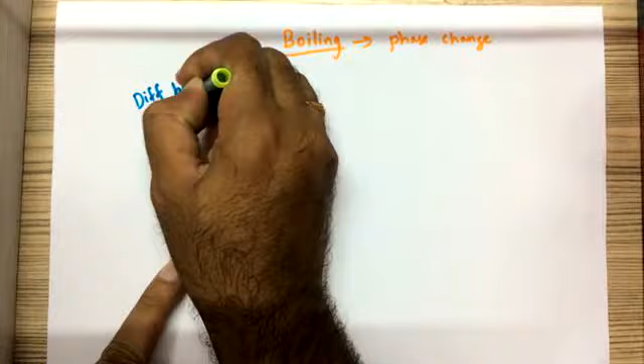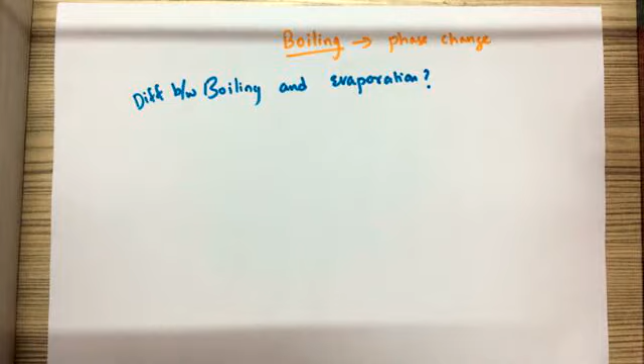Now, boiling is definitely, there's no doubt, a phase change. If I ask you the question, what is the difference between boiling and evaporation, you may answer, but you will definitely say that both boiling and evaporation are related to phase change. We know both are related to evaporation itself, phase change itself.

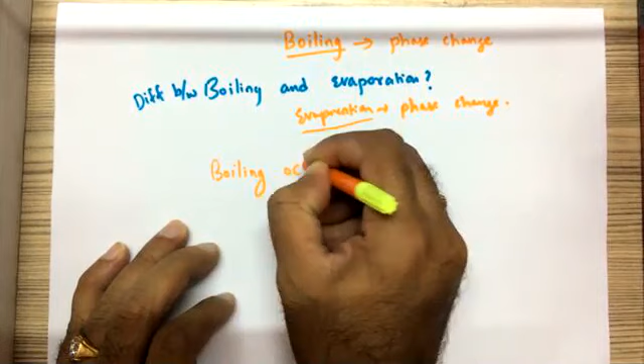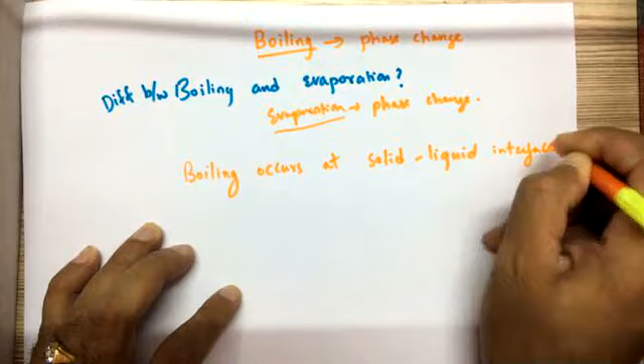Now the difference between boiling and evaporation is: boiling occurs at the solid liquid interface, whereas evaporation occurs at the liquid vapor interface. I hope you understand now what I'm talking about.

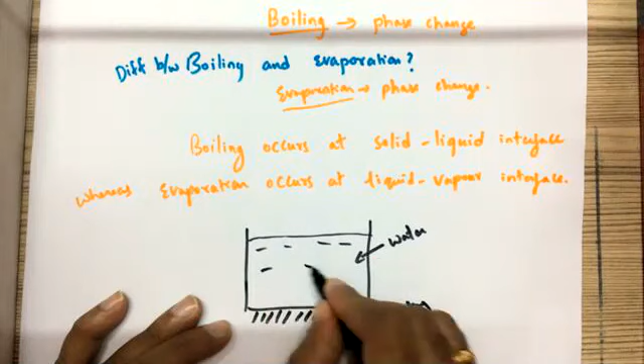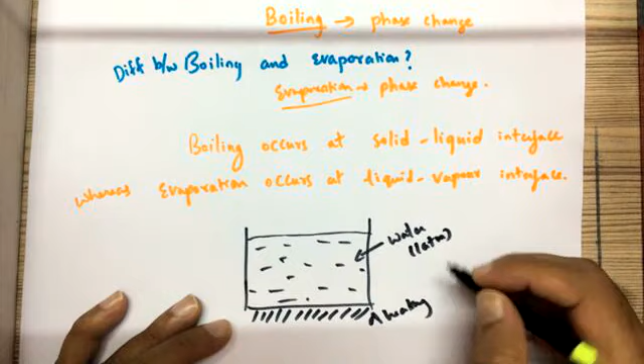Now let me take a kettle, and I'm just giving heat from this end, I'm just heating it. Inside I have some liquid, let's say water, at normal atmospheric pressure, which is 1 atmosphere. This is solid, this surface, and inside I have liquid. And here I have vapor.

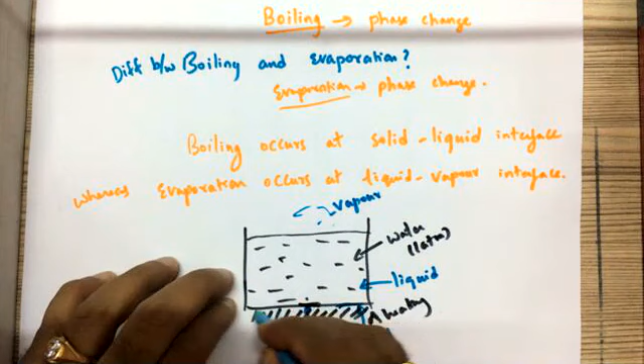So what is this interface? This interface I can call the solid liquid interface. This is solid and this is liquid. So this particular layer, I can call it the solid liquid interface.

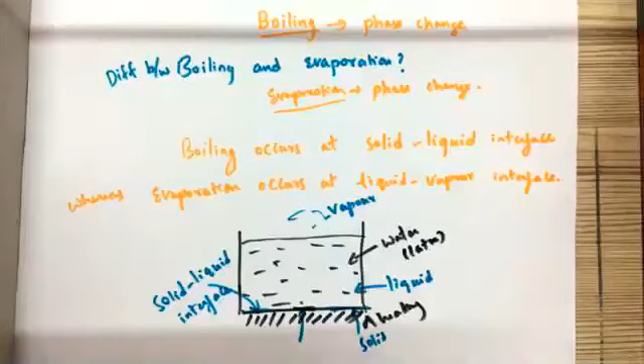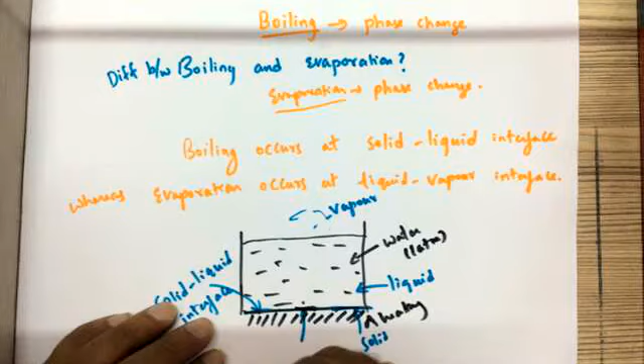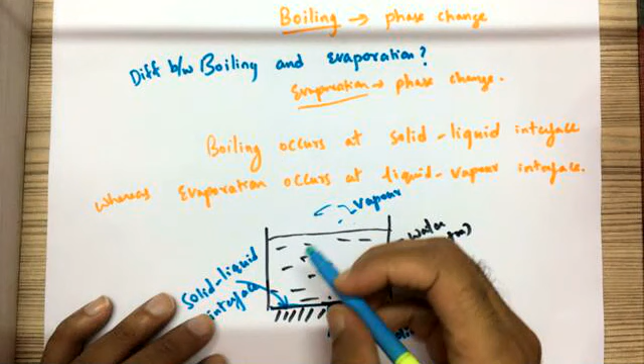So this is like, I have a pan, and on top of that I have some water. Then I can say that particular layer of water, which is on the surface, that layer or imaginary interface, we call the solid liquid interface.

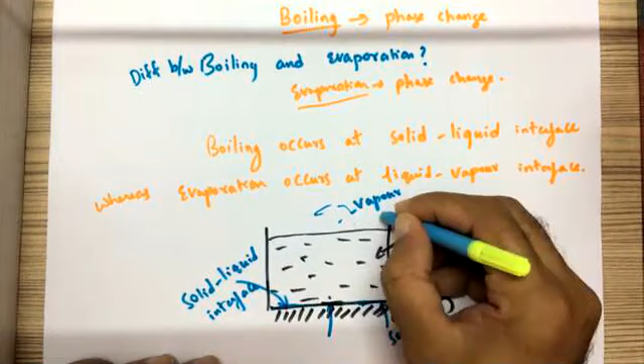And this, as you know very well, is vapor and this is liquid. So this would be the liquid vapor interface. Am I right? Now if you observe very carefully, boiling occurs here.

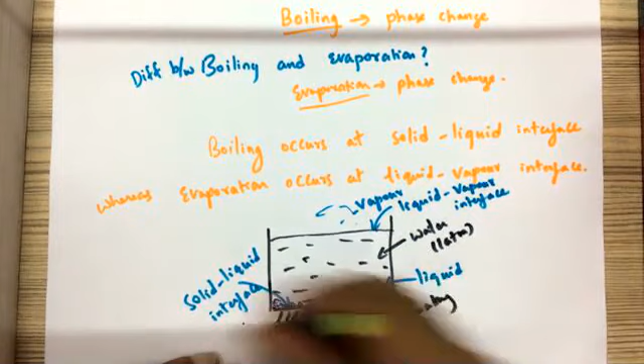You see small bubbles rise. Initially they occur at the surface of the pan. So what is that surface? That surface is nothing but the solid liquid interface. So boiling always occurs at the solid liquid interface.

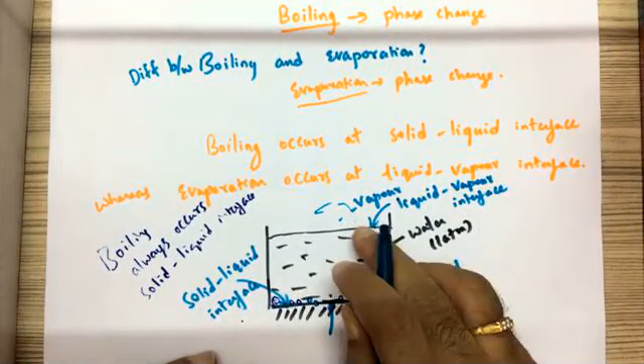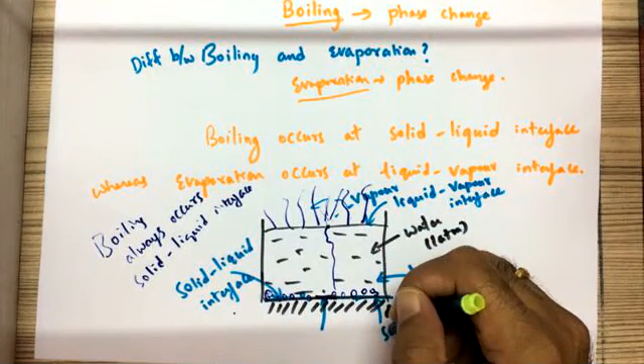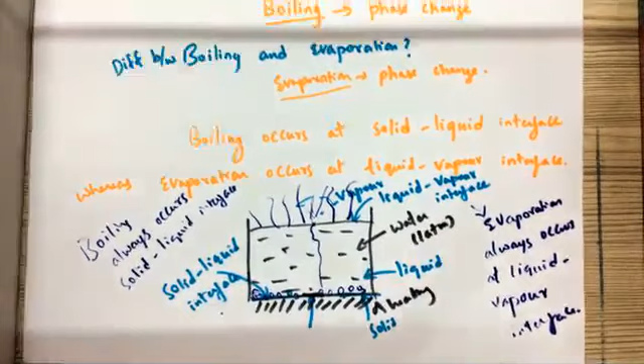Whereas in evaporation, these bubbles rise up and vaporize. That means from the surface of the liquid, they just evaporate. So evaporation always occurs at the liquid vapor interface. You got to be very careful about this.

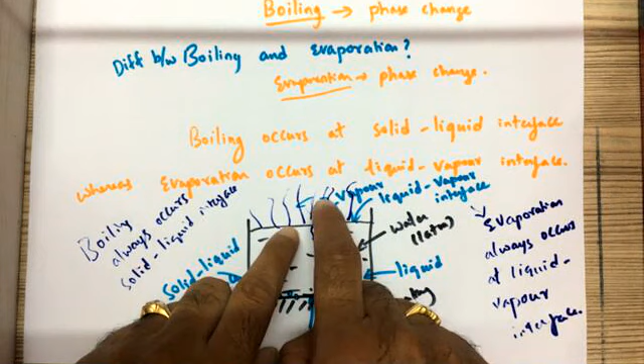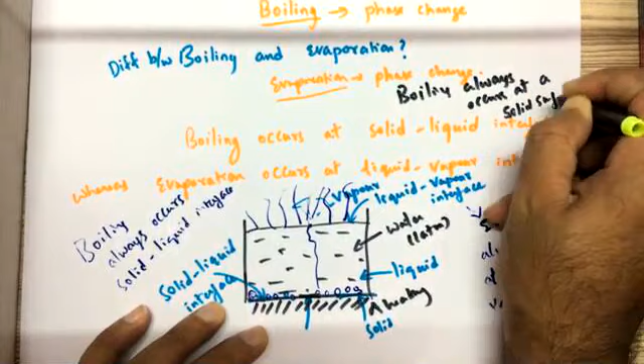Because most people think boiling is the same as evaporation. No, it's not. You cannot call the place where liquid to vapor phase change is taking place as boiling, because boiling always occurs at the surface of the heating element, a solid surface. Remember, if there is no solid surface, there will not be any boiling.

But for evaporation, you don't need that. If you have a pool of liquid, and by some means the liquid is heated up, the liquid gets evaporated. So evaporation always takes place at the liquid vapor, or liquid gas, interface.

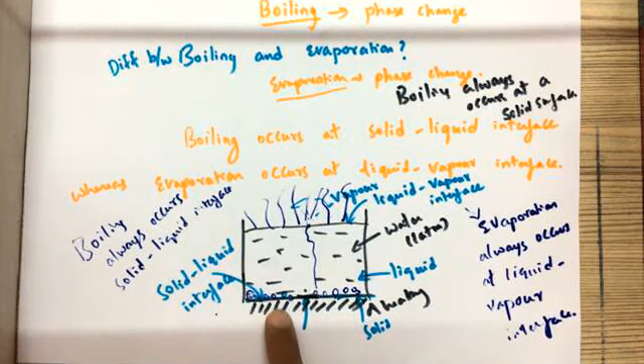Vapor is nothing but some gas. So liquid gas, or liquid vapor interface, whereas boiling should always occur at a solid surface. So boiling always occurs on the solid surface, where on top of that solid surface you have some liquid, either water or some other liquid. So what I mean is, boiling always occurs at solid liquid interface. Try to understand this.

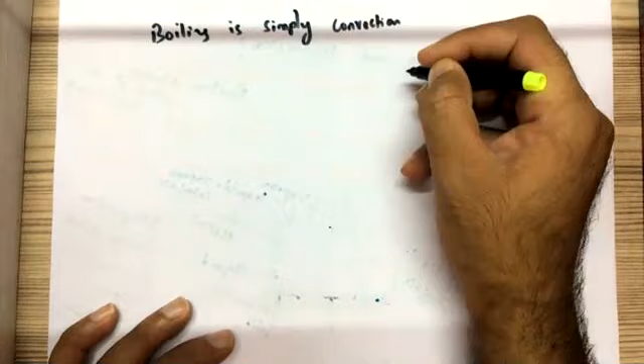Now, what is boiling exactly? Boiling is simply convection, which you have seen right now. So if the surface of the pan is heated up, what happens to the liquid inside it? The surface of the pan gets heated up, and that heat is convected to the liquid. So boiling is simply convection.

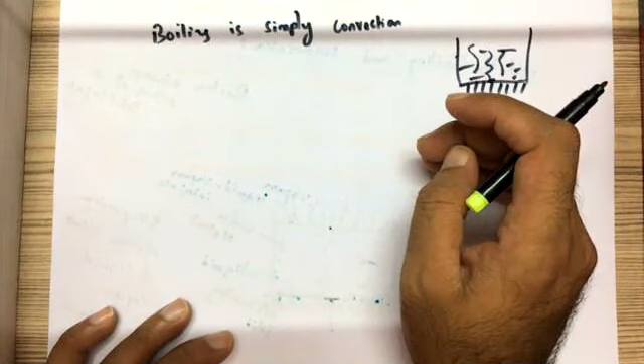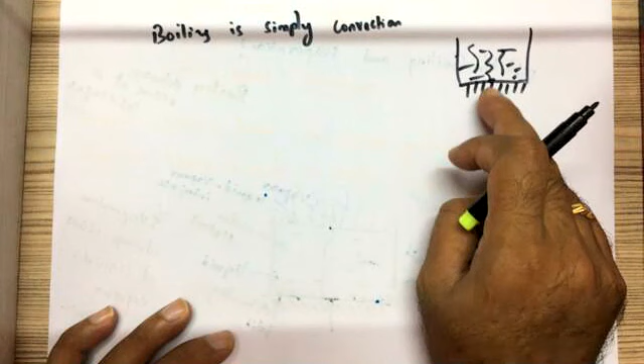We know heat transfer taking place from a surface to liquid, or for that matter any fluid, we call it convection. So when we say liquid, boiling should happen at a solid liquid interface. It's not gas. That is the reason I'm not saying fluid, because fluid could be either gas or liquid. Boiling should occur at the interface of a solid surface, on which you have certain liquid. Underline that, liquid.

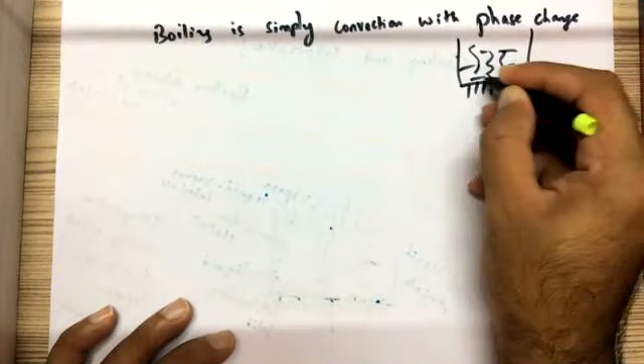So boiling is simply convection with phase change. Why phase change? Because you will have small bubbles. What would be there inside the bubble? Inside the bubble you have certain vapor or gas. So it is phase change. Phase is being changed, you have two phases, both liquid as well as vapor.

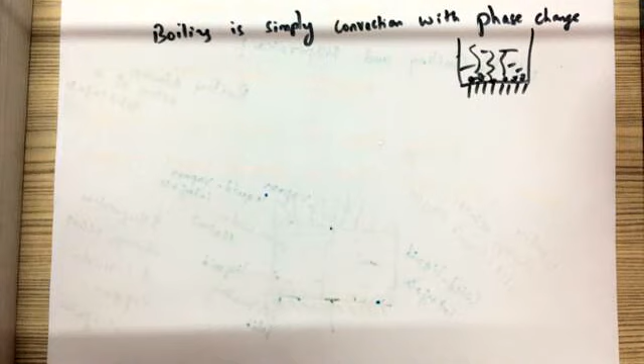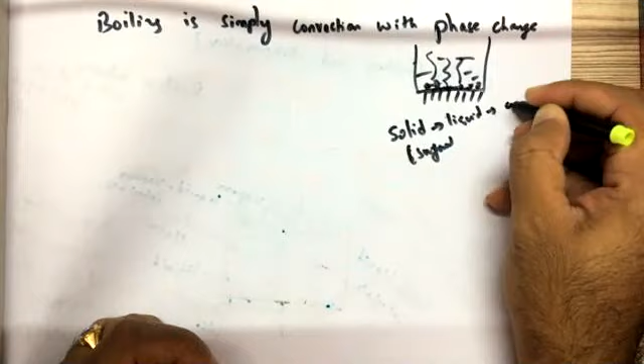When it is occurring at a solid surface, you have all three interfaces. What is that? Solid, which is the solid surface. You have liquid, and when the bubble arises and pops up, then it is gas. So it's actually a triple point. You got to be very careful about this.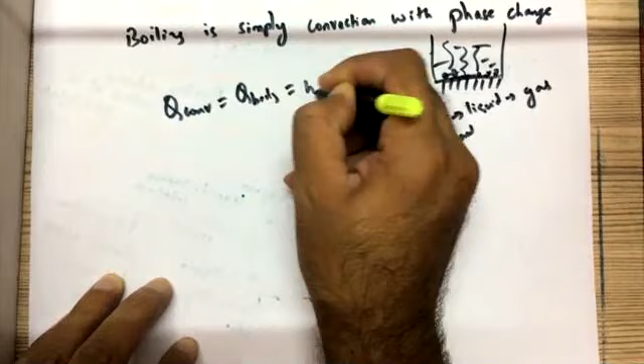So generally, just like Q convection, Q boiling is also same as hA delta T. What is delta T here in this case? Instead of T, delta T is surface temperature minus liquid temperature, but we do not know what the liquid temperature is. Liquid temperature could be anything. So that is the reason generally we take this saturation temperature.

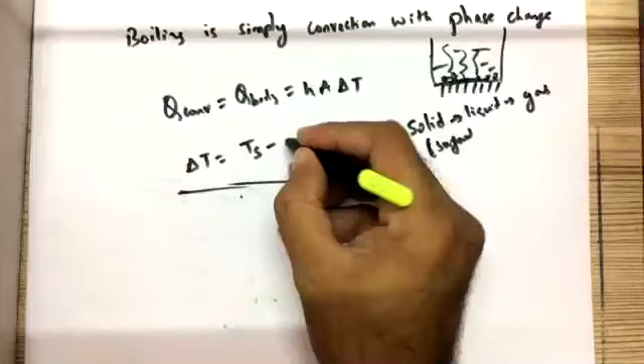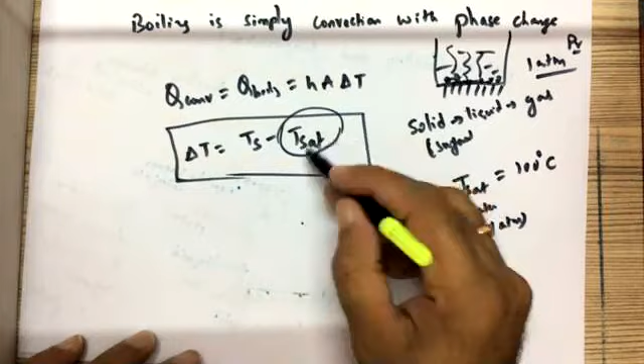What is the saturation temperature of water? At 1 atmospheric pressure, the saturation temperature of water is 100 degrees Celsius. So delta T is Ts minus Tsat, and this Tsat depends on the liquid. If the liquid is water at 1 atmospheric pressure, normal atmospheric pressure, then it would be 100 degrees Celsius. That is the reason we call it excess temperature difference.

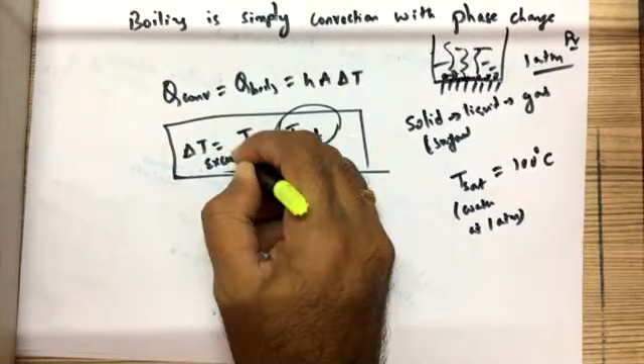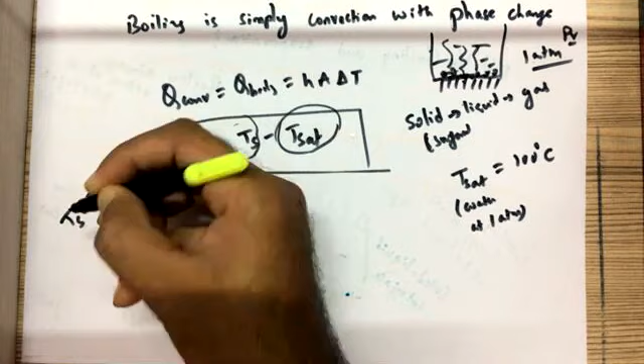Generally, Ts depends on your heater, so whatever heat input you give, based on that your surface temperature would be. Of course, if you give more heat input, your surface temperature will increase. So Ts is the surface temperature, and normally in convection we say delta T is Ts minus T infinity. But in this case, we do not know what that ambient liquid temperature is, because ambient liquid temperature keeps on changing. That is the reason we call it excess temperature.

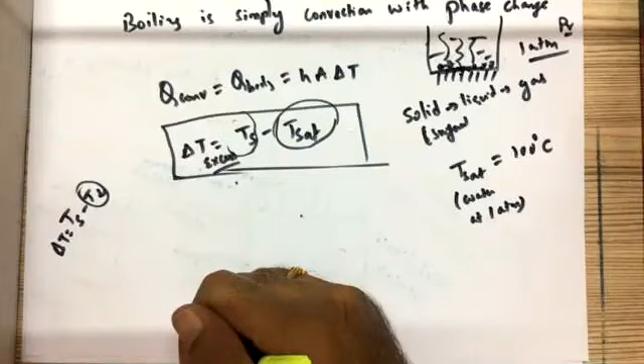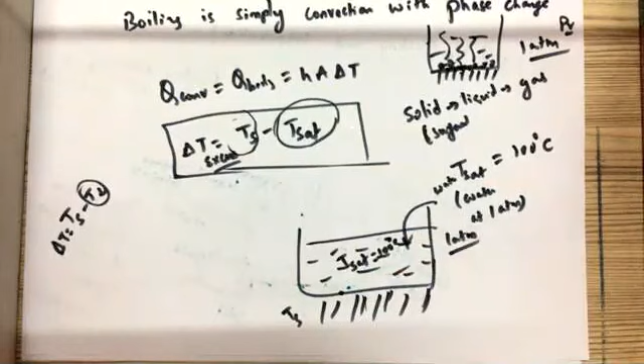Until what point will it change? Until it reaches the saturation temperature. Let us suppose you have a pan like this, and inside it you have certain liquid, let's suppose water, at 1 atmospheric pressure. When water is at 1 atmospheric pressure, you are inputting heat, this is surface temperature, and until water reaches saturation temperature, its temperature gets increased. Until water reaches 100 degrees Celsius, temperature keeps on increasing. Once the water inside the kettle reaches 100 degrees Celsius, further increase in temperature will not happen.

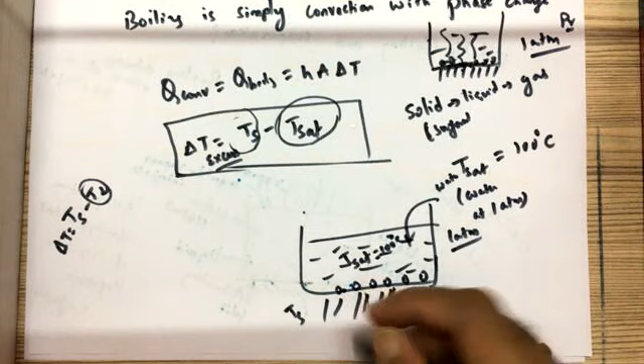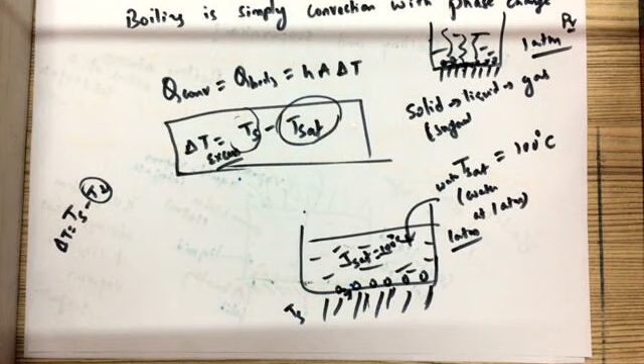Why? Because at that point, boiling takes place at the solid-liquid interface. At that interface, you will have phase change. So whatever heat input you give will not be used to increase the internal energy of the liquid, and thereby the temperature will not increase. But when it reaches the saturation temperature—for water at 1 atmospheric pressure, that's 100 degrees Celsius—the further increase in temperature of the water will not happen. Instead, the boiling, the phase change, takes place at the solid-liquid interface. Is that clear?

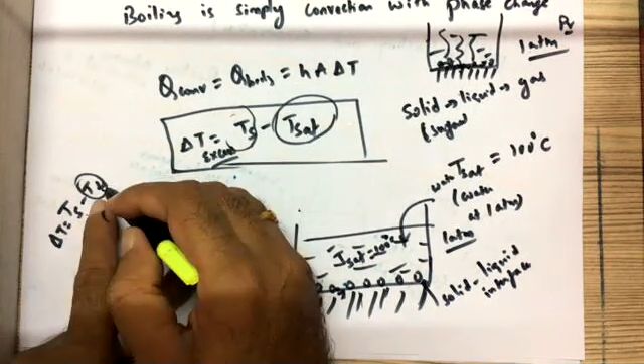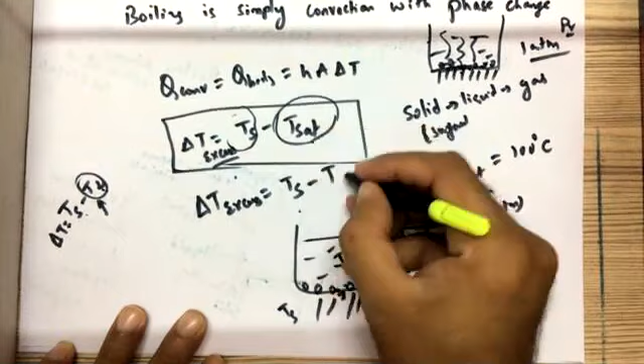So instead of saying Ts minus T infinity, I know T infinity will not reach any value it wants—it can only reach up to T saturation. So instead of delta T, I call it the excess temperature difference, which is Ts, the surface temperature of the heater, minus T saturation, the saturation temperature of the liquid inside the pan. This is very important: this is your excess temperature, the difference between surface temperature of the heater and saturation temperature of the liquid. This is watts per meter square, and this could be either degree Celsius or degree Kelvin since it's a temperature difference.

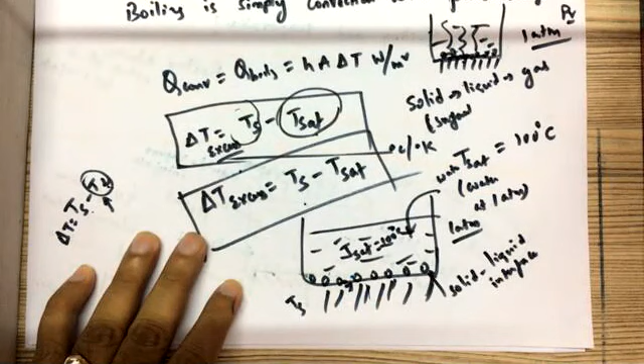So excess temperature is Ts minus Tsat. Is that clear?

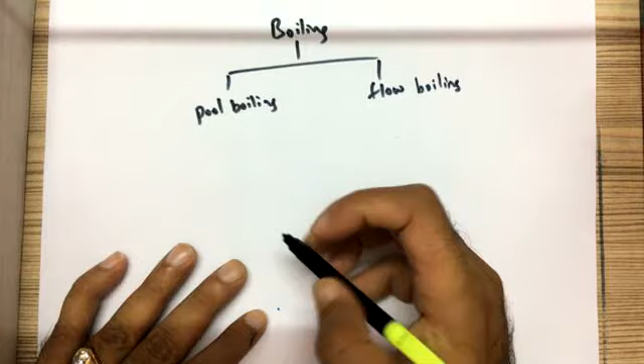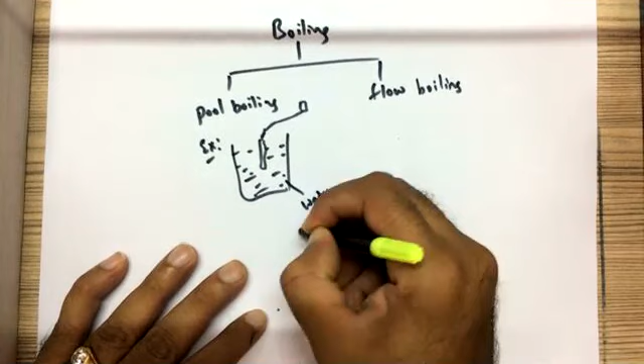Now we have two types of boiling: one is pool boiling, and the other is flow boiling. Example of pool boiling: you have a bucket of water, and inside it if you put your geyser, what happens? You have water inside it, and obviously the water would be at 1 atmospheric pressure, so the saturation temperature is 100 degrees Celsius.

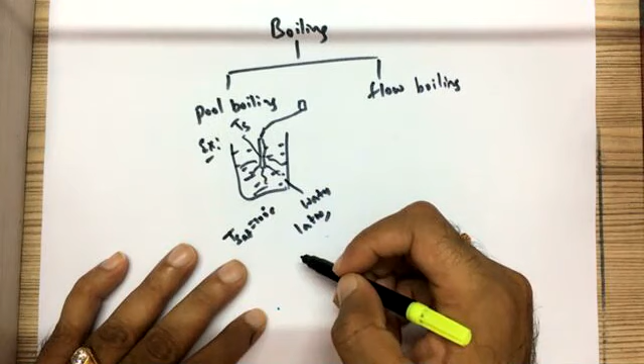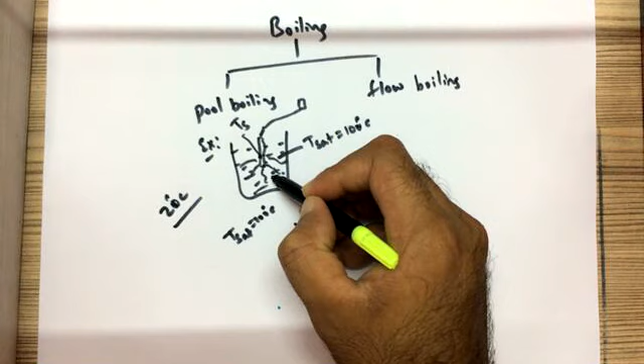You turn on the heater, and the heater surface temperature would reach a certain value depending on its rating. Initially, heat will be convected to the liquid until it reaches 100 degrees Celsius. Let's say the liquid starts at 20 degrees Celsius, room temperature. Once the liquid reaches the saturation temperature of 100 degrees Celsius, what happens after that? This is the surface, Ts—you can see heat coming from this surface, which is the geyser surface, the surface of the heater. Surface temperature is Ts, and it gives up heat to the surrounding liquid, which is initially at room temperature, say 20 or 30 degrees Celsius. Once the geyser is on, heat will be transferred from the geyser surface to the surrounding liquid until it reaches 100 degrees Celsius.

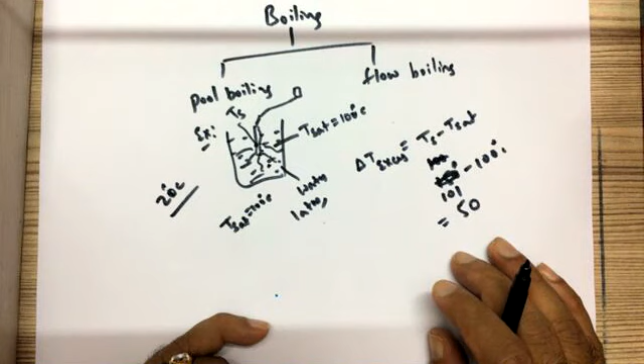Once it reaches 100 degrees Celsius, consider Ts minus Tsat. Let's suppose the surface temperature is 150 degrees Celsius, and Tsat is 100 degrees Celsius. Initially, the surface temperature keeps increasing as the heat input increases. At one point, both will be at equilibrium, that is, 100 degrees Celsius—surface temperature would be 100 and Tsat would also be 100. But at this point, the temperature of the water will not increase further because it has already reached its saturation temperature of 100 degrees Celsius at that atmospheric pressure. So at this particular point, the excess temperature would be 0 degrees Celsius.

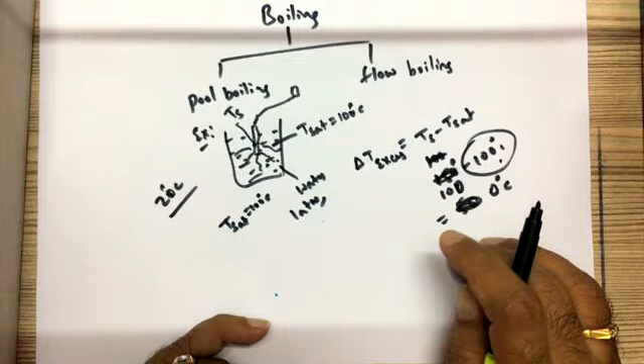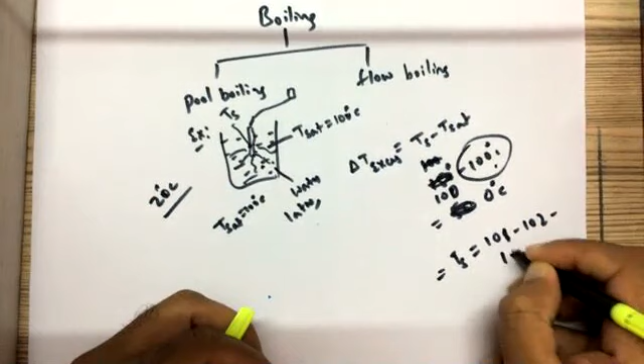So at this point, there will not be any boiling observed at the surface. But what happens when the surface temperature increases to 101, 102, 103, 104, 105 degrees? You will see small bubbles arising on the surface of the heater. Or if you take a pan, fill it with water and give heating, let us suppose the pan surface is the heating surface. So what happens? Initially, until 100 degrees Celsius, nothing will happen.

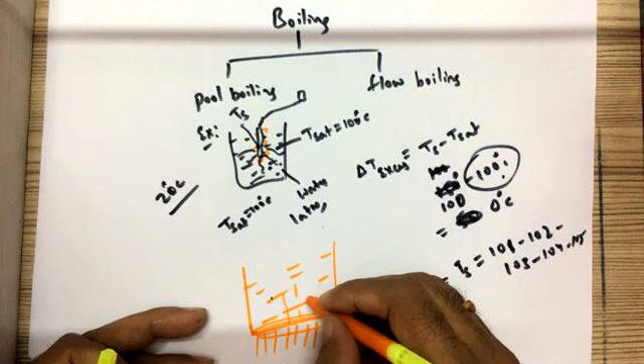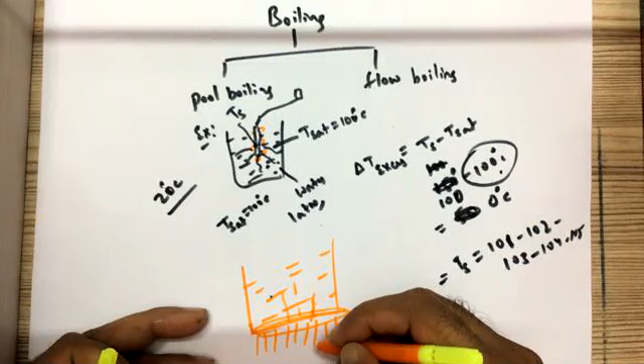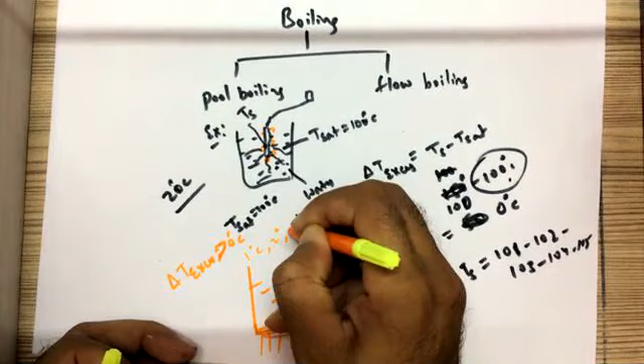After the water reaches 100 degrees Celsius, which is the saturation temperature at one atmospheric pressure, if there is further increase in heater temperature, the heat cannot be given up to increase the temperature of the liquid further. So the temperature of the liquid cannot increase further, but the surface temperature can increase. As the surface temperature increases more than 100 degrees Celsius, if delta T excess is greater than 0 degrees Celsius—1 degree, 2 degree, 3 degree and so on—small bubbles will occur at the heating surface.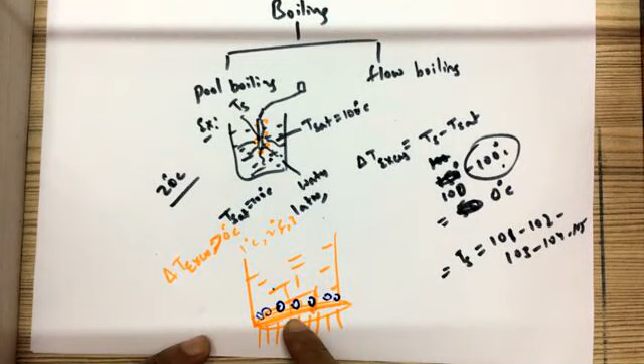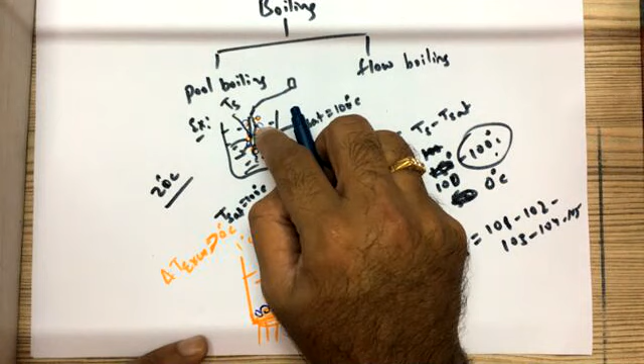This is the surface from which heat is being given, so that is the reason boiling happens here. In this case, the surface is the geyser surface. That is the reason I have shown the bubbles on the surface of the geyser, which is the heating element. In this case, the heating element is the surface itself, the surface of the pan. In this case, the heating element is the geyser. So on the surface of the geyser boiling will take place, because boiling always occurs at the solid-liquid interface. Am I right? Fine.

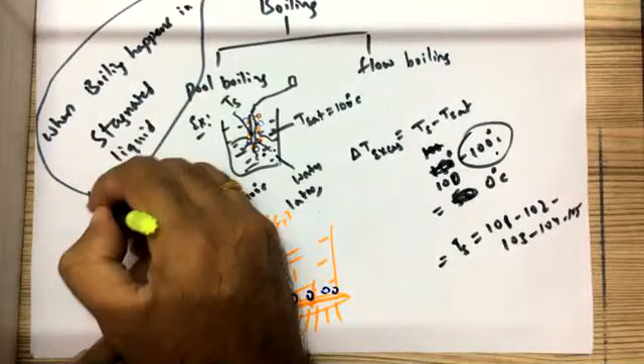When boiling happens in this kind of situation, since you have a pool of water, stagnated liquid, when boiling happens in stagnated liquid, then we call it pool boiling. Now come to the next one.

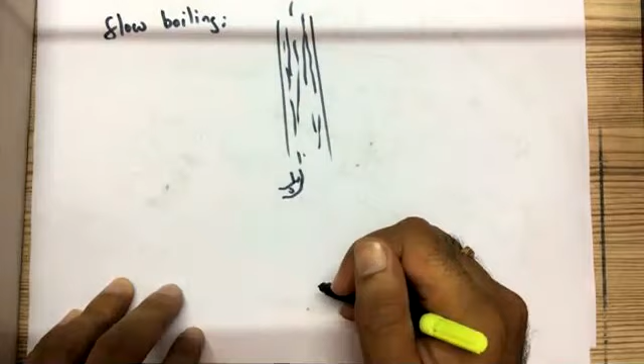What is that? Flow boiling. Imagine you have a tube and a pump here, and water is being pumped inside, so water is flowing at a certain velocity. If you have a heating coil or heating element on the surface of the tube, the tube surface gets heated up.

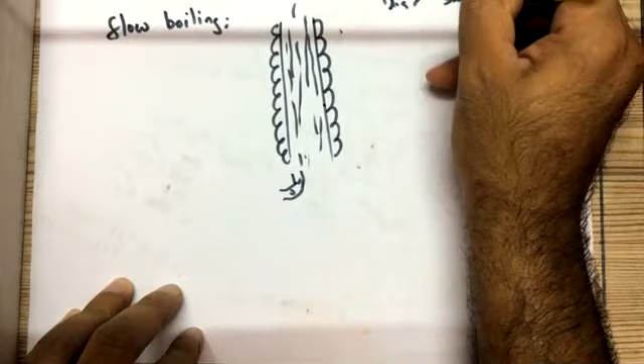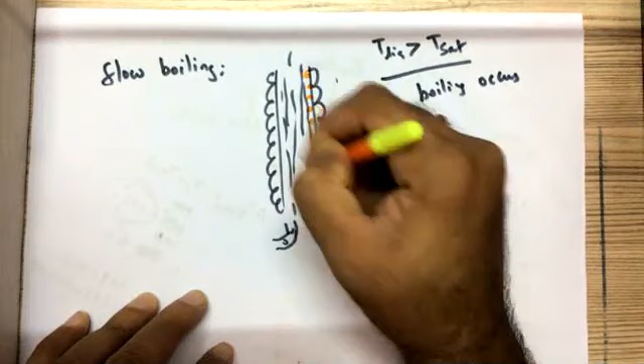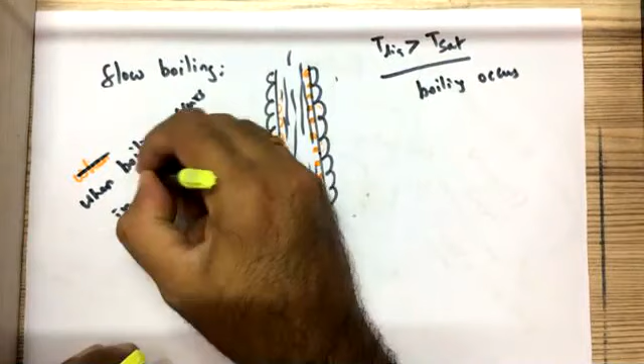The liquid flowing inside it also gets heated up when the liquid temperature is greater than its surface temperature—wait, when the liquid temperature is greater than the saturation temperature, boiling occurs. On the surface where the heating element is, you will have small bubbles. But here the liquid is not stagnated, it is flowing. So when boiling occurs in flowing liquid, we call it flow boiling.

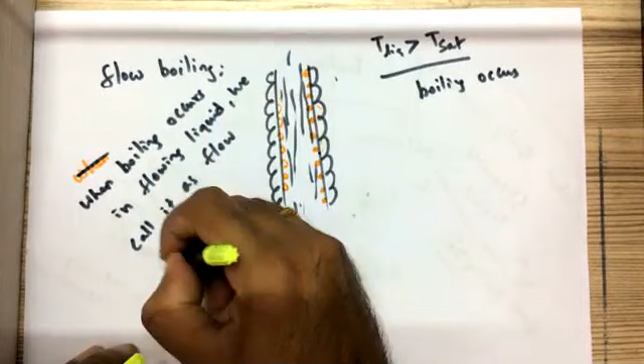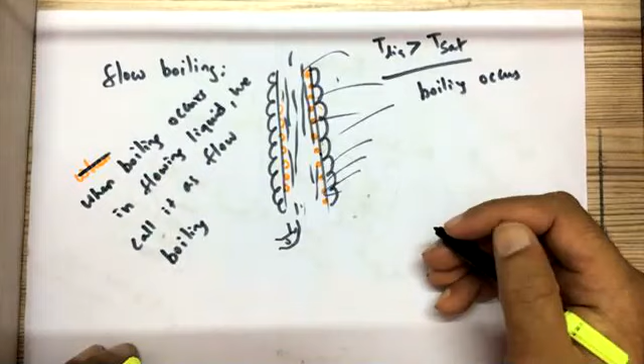If it is a nuclear reactor, there is no need of any heating element like this—by the neutrons hitting the element, because of nuclear fission, the surface gets heated up, and the flowing liquid inside the tubes gets heated up, and you get boiling. The vapor from the boiling is expanded into a turbine, and you generate power. This is how nuclear power plants work. But basically you don't need to think in that complicated way.

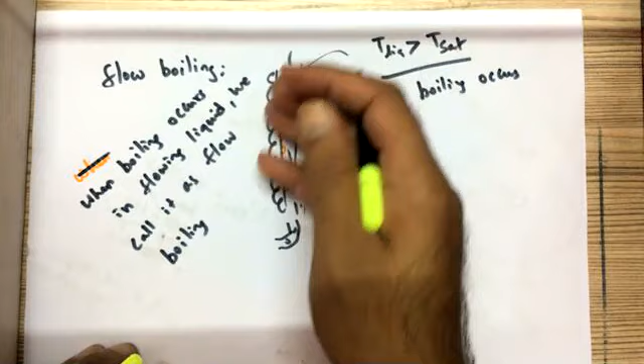Think of it simply: you have a heating element, and because that heating element is wrapped onto the tube surface, the tube surface gets heated up, and heat is transferred to the liquid. When the liquid temperature is more than the saturation temperature, boiling will take place, right? So this is the basic definition of boiling. Is that clear? Fine.

We will look into the boiling curve, how boiling takes place, what are the phases in boiling, how the bubble generates. All these things we'll look into in the next lecture. Okay.